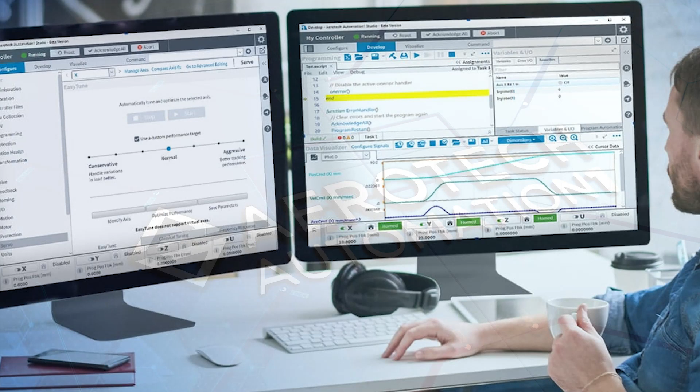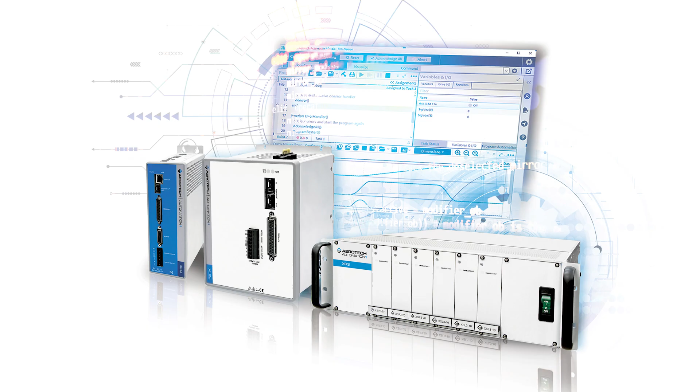Automation1 is a motion control platform consisting of software-based controls and development tools, PC and drive-based hardware, and hardware-based drives for servo motors and other devices. In this video, you will discover new features available in the 2.3 Automation1 release.

This includes additions such as Automation1 iXL2e support, MachineApps full support, EtherCAT full support, velocity and current mode additions, the official Q mode support, as well as several improvements such as data visualizer, programming module, EasyTune, .NET API, and Python API improvements. Let's get started with the Automation1 iXL2e.

This is an enhanced compact linear servo motor drive with a motion controller. The Automation1 iXL2e is a powerful machine and motion controller. It controls up to 12 axes over the Hyperwire fiber optic network. It executes real-time AeroScript programs and can also be communicated with via the .NET, C, and Python APIs from Automation1.

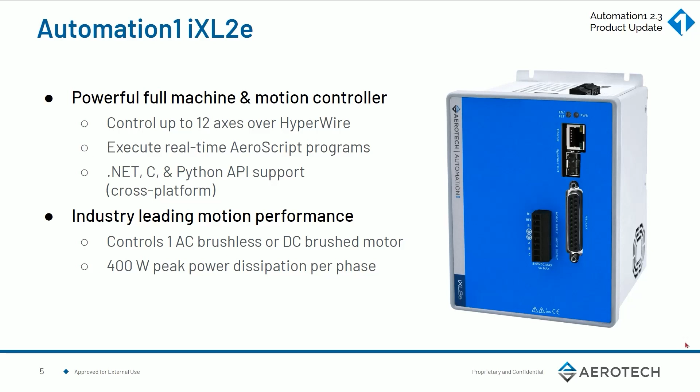These are cross-platform for Windows and Linux applications. It also has industry-leading motion control performance as far as controlling a servo motor or a precision stage. It can control one AC brushless or DC brushed motor. Often AC brushless motors are integrated into the stages, and it also has up to 400 watts peak power dissipation per phase. Onboard I/O expansion capabilities are available, although not pictured in this image.

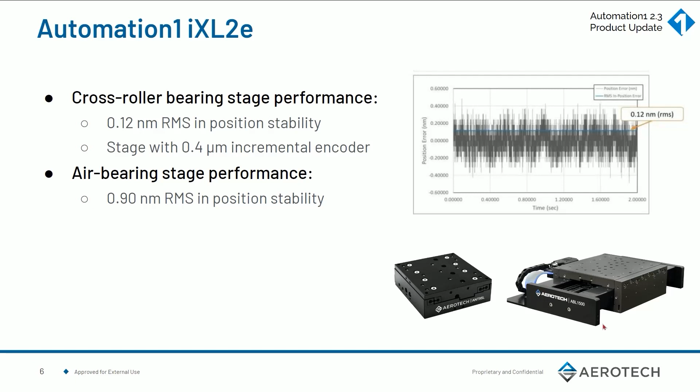The Automation1 iXL2e on a cross roller bearing stage demonstrated industry-leading performance: 0.12 nanometers of RMS in position stability, measured by a stage with a 0.4 micron incremental encoder. On an air bearing stage, which doesn't benefit from the high friction in the cross roller bearing, it also achieved very good results: 0.90 nanometers of RMS in position stability.

Moving on to the connectorization of the Automation1 iXL2e, you'll see that the main motor supply and motor output are all in one single connector. To the right of that, you have your feedback for all of your stage signals and encoder feedback signals. You would connect to this from your PC or network over the Ethernet network.

Also available is connectorization by USB. You would then connect to several other Automation1 drives over the Hyperwire network, up to a total of 12 axes of control, so 11 additional axes over the Hyperwire network, which you only have an output here on this drive because the controller is actually integrated into this drive hardware.

If you choose to purchase the expansion board, you would get the position synchronization outputs, the auxiliary encoder channel, and also analog and digital I/O. If you choose to expand with the EB2 option, instead of the I/O, you would get industrial Ethernet support on the top of the drive. So these two come with EB1 or EB2. The point-to-point I/O comes with the EB1. The industrial Ethernet I/O expansion comes with EB2.

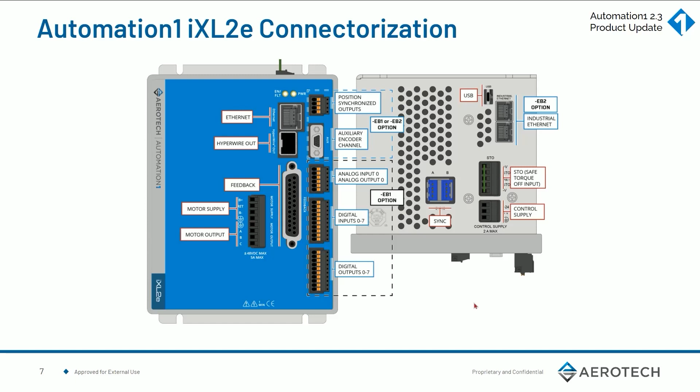Standard on the drive will be the sync port for all options, and those are for communicating encoder data to and from other axes on the system. And of course, the safe torque off, integrated safety, and the control power here as well. So that's the connectorization of the iXL2e from Automation1.

Let's look at a comparison versus legacy ML drives. Comparing this to the Ensemble ML, first of all, let's note that this is the in-place kind of replacement, the Automation1 replacement product. In the Automation1 version, the iXL2e, the drive array is 67 times the size of what the ML brings to the table.

That also is coupled with a much faster drive data capture rate, 10 times the speed at 320 kilohertz. But please also note that these values are 64-bit values, not 32. So effectively 20 times the rate when you look at all the data, the throughput.

As for safety, yes, there's functional safety, STO. There's sine wave quadrature emulation. Latency is 4 times faster at 0.8 microseconds versus 3.25 microseconds. And then there's more encoder channel options and more PSO options.

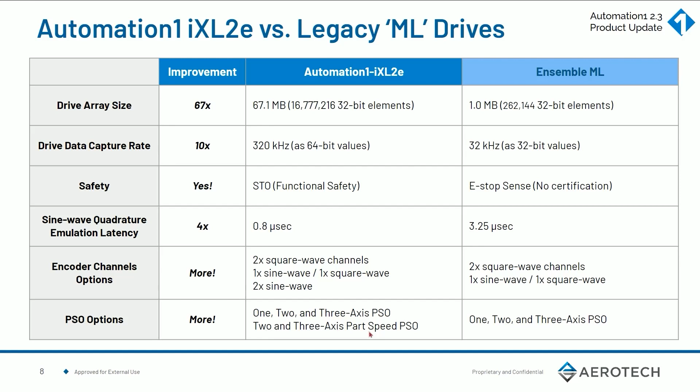Highlighting that is 2 times sine wave inputs, so you can have primary and auxiliary sine wave encoder inputs, often required for dual loop multiplied control of a stage system. For PSO options, you have the option of purchasing the 2 and 3 axis part speed PSO options, which were not available in the Ensemble product line at all.

Moving on to the controller side of things, the Automation1 drive-based controller has several advantages versus the predecessor, the Ensemble. The first is that we have 2 more axes of control available. For all systems, you can get up to 9 user tasks to program and 1 reserve task. This is 5 total tasks more, and at least 4 more tasks for a user to use, so that's a big addition.

Another big advantage is that the servo trajectory rate at the controller is calculated at 20 kilohertz. Please note that the Ensemble tried to solve that problem by doing interpolation, which was very nice and well received and ahead of the servo loop, but those were not calculated points like the controller actually calculates. The points are not interpolated.

Look ahead and acceleration limiting is always included on the ISMC, the Automation1 controller. G-code programming is always available. Corner rounding, parts rotation, and retrace are always available on all Automation1 controllers. They weren't even available on the Ensemble motion control platform.

Then, of course, you have this key advantage of developing your application in the Automation1 Motion Development Kit, which is a much more advanced software tool than the Ensemble Motion Composer suite.

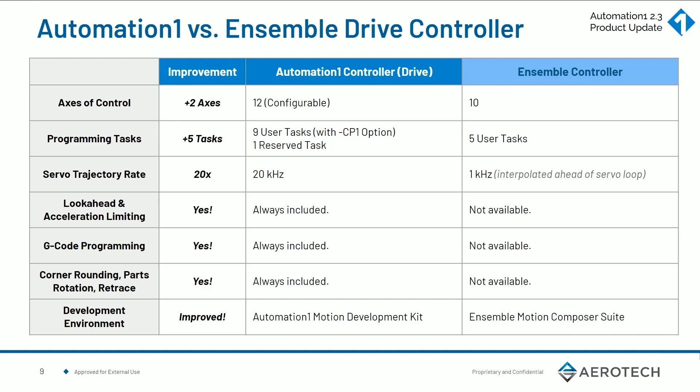Now, when it comes to ordering options, you have 1 peak current option, 10 amps peak. You have 3 different expansion board options: either you don't need one, or you get the IO-based one that we just saw, or the industrial Ethernet-based expansion board. Those are the 3 options you have, EB0, EB1, or EB2.

You have 3 multiplier options. Either you don't need an encoder multiplier, MX0, or you just need 1 encoder multiplier, that would be MX1. Or in the rare case you do need 2 multiplied encoder inputs, you can get the MX2 option and have 2 multiplied encoder inputs for 2 amplified sine wave encoders.

When it comes to PSO, as noted, you see the PSO5 and PSO6 options for part speed PSO, but you also can order the 1, 2, or 3 axis traditional Aerotech PSO based upon the encoder feedback, firing an output based upon actual distance traveled, the position synchronized output feature. So plenty of options in the Automation1 IXL2E.

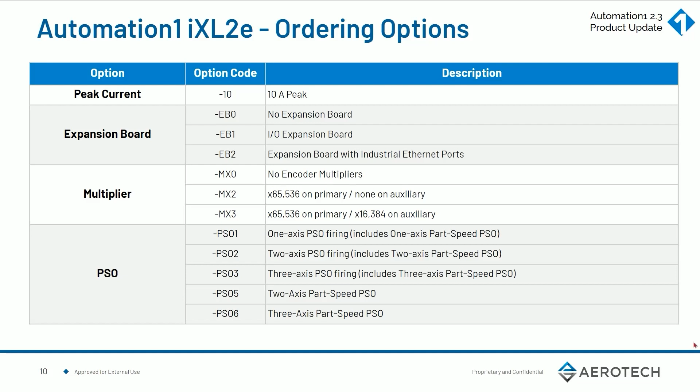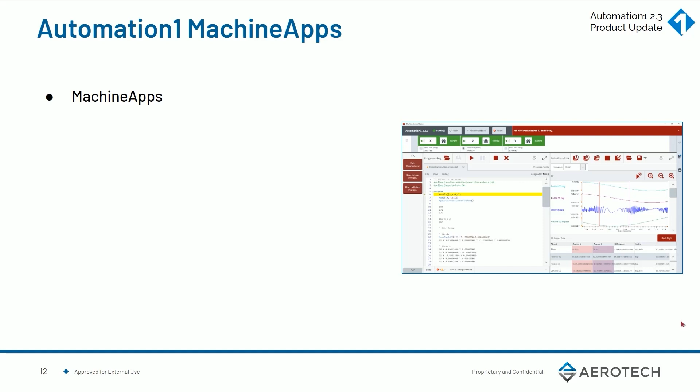Moving on to MachineApps. This is an HMI builder for Windows PCs. In 2.3 Automation1, we have the first official release of MachineApps, and again, this is for custom user interfaces for Windows PCs.

To create these interfaces, you would use the MachineApps Workspace. This is your design tool, and it is an Automation1 MDK ordering option. It also shows up as a workspace inside of the MDK when you order it. Now you also get the MachineApps application with every installation of Automation1's MDK.

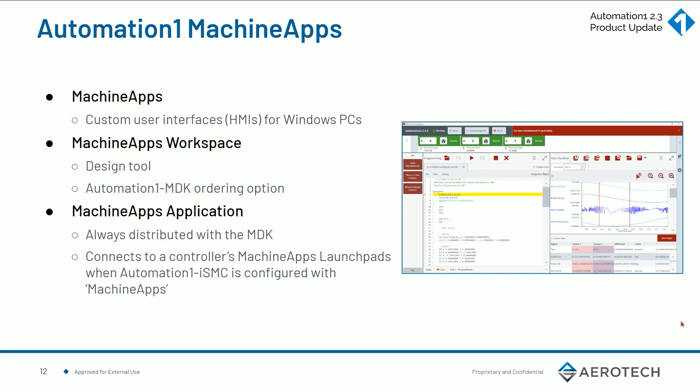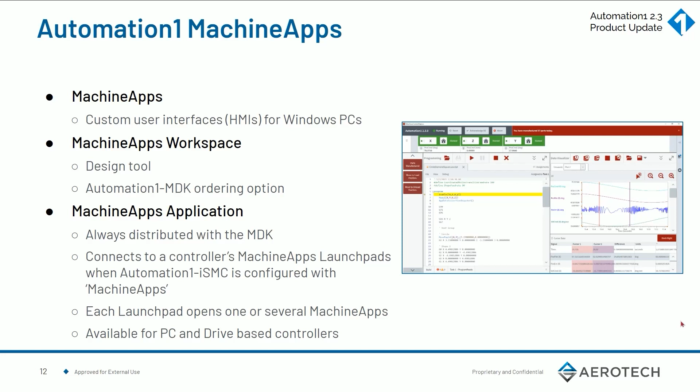That application allows you to connect to a controller's MachineApps launchpad when that Automation1 ISMC controller is configured with MachineApps. Each launchpad opens 1 or several MachineApps. And this, of course, is available for PC and drive-based controllers. So it doesn't matter how you plan on deploying your ISMC, you can take advantage of these great new HMI tools from Aerotech, the MachineApps feature and toolset.

When you get into the actual workspace after defining your layout, then you start picking some settings. You would name your machine app, pick icons and colors. This is how you deploy your own brand, more on that later. You would opt into touchscreen sizing if you want to deploy to a touchscreen monitor, and this is only in beta right now, so we're going to be doing some more work in this area.

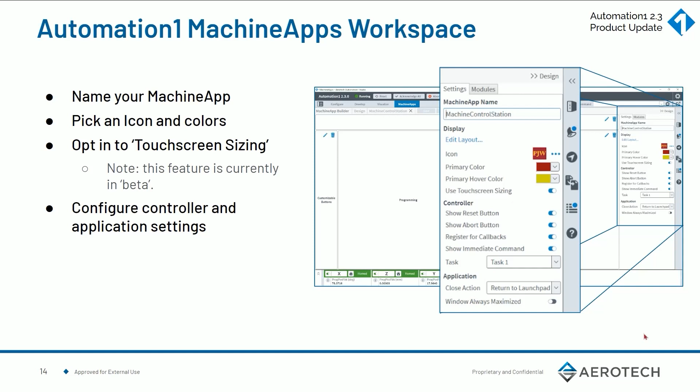You'd also configure your controller and application settings, such as showing the reset or abort buttons, whether you want to register for callbacks—that depends on the type of application you're building—whether you want to show the immediate commands in this machine app or not, and then also what happens when you close the machine app. I enjoy closing it and returning back to the launchpad where I may have several machine apps and want to open up another one.

Next up, you look at the modules section, and this is where you drag and drop your modules into place. As you can see on this screenshot, each area has a module defined: axis dashboard, customizable buttons, programming, data visualizer. We've already dragged and dropped modules into these different module areas.

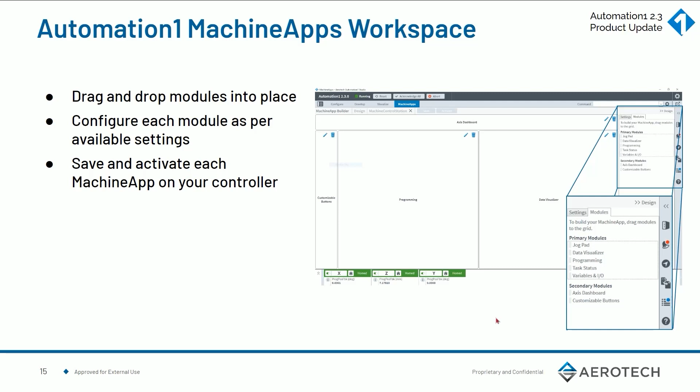Then you would save and activate. So up here, you can see it's in gray, but it says save and activate that on your controller. So this machine app has been laid out, it's been saved, and it's active on the controller of which we're working.

Let's go module by module and see which features are available in each module available to you in MachineApps.

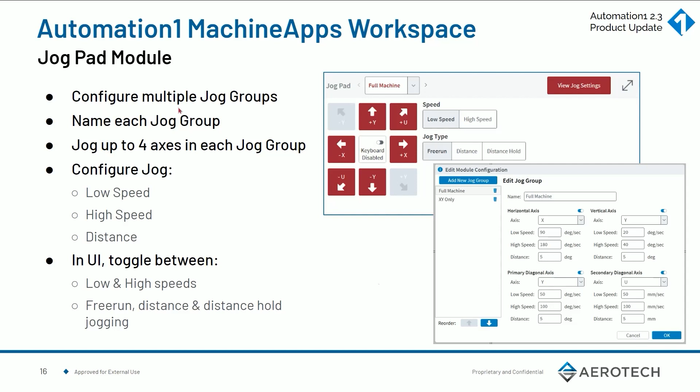First, the jogpad module. You'll see in the configuration, you can do things such as configure multiple jog groups. You can name each group. Each group can jog up to 4 axes. You can configure low and high speeds and distance.

And then from the UI, which is what this background image is, it's actually a screenshot of the user interface that you would have on the machine app. You can choose whether you want the low or high speed, whether you want to jog in free run distance or distance hold mode.

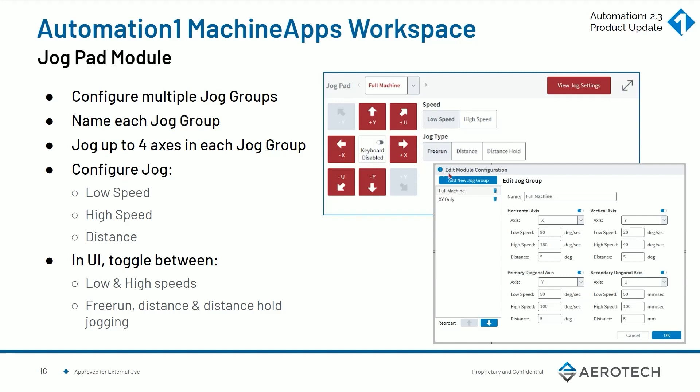And then you can change between your different jog groups. So I can change from full machine to just XY only, which are my 2 named jog groups that you see here in the module configuration module. So this comes up and allows you to pick all your settings for how you want this to work in the UI.

Next up, the data visualizer. Same idea, you have a configuration screen. Whenever you drag and drop that module into place, this will pop up, and then you just fill out these options. And then the output of that is that the user in the machine app itself would see this data collection screen. As you can tell, all the colors I picked in my branding are applied here to all of the push buttons. So you have some custom capabilities you can deploy.

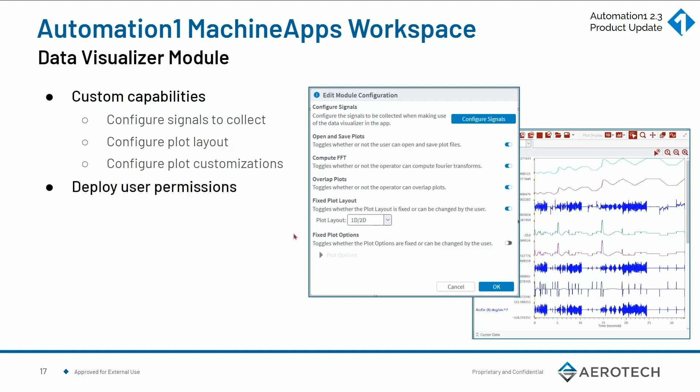You can configure signals to collect. So you'd click on this and a signal configuration dialog would open. You can configure your plot layouts. You can configure plot customizations. And you can deploy user permissions for different features, such as open and saving plots, computing fast Fourier transforms, switching plot layouts, and changing plot options.

Moving on to the programming module. This module, you can see in this image, the actual deployed module has the touchscreen settings enabled because we have the large push buttons here for the control of the actual programming module in the machine app itself.

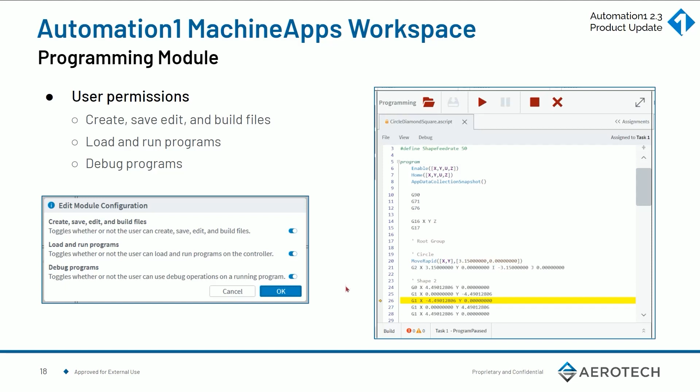Here you can pick your user permissions. So what things do you want your user to be able to do when using this programming module? Well, here you have the options of create, save, edit, and build files, load and run programs, debug programs, and those are the 3 options you can opt into or opt out of in the programming module.

Here you also have task status and variables and IO modules. There's not much to say here. You can add these to your user interface. And the only real permission to add here is editing access to variables and IO values. So you can say, yes, you can edit the value of IO. So here you see I have that permission enabled that you can do this.

This toggle switch allows you to toggle the state of an actual digital output. So this gives you the ability for a user to do that. If you don't want users messing with outputs through this module, simply turn that off and your user will not be able to do that.

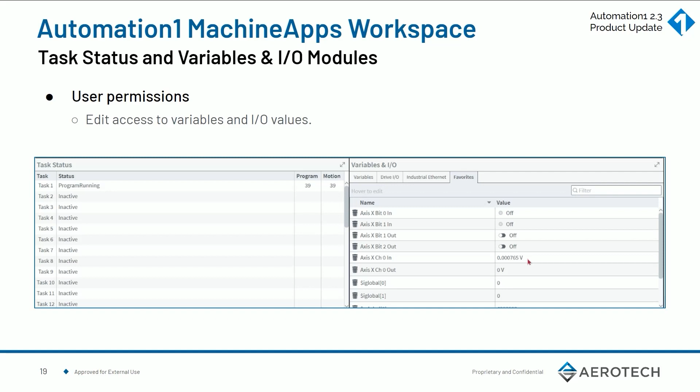Moving on to secondary modules, the Axis dashboard. It's not really secondary in use. This is a very often used module, but it's just secondary in layout, or it actually shows up on the screen. It's not part of your primary layout.

So looking at the Axis dashboard, you can see again, this is in the touchscreen mode with the large buttons, making it easier for an operator to hit the right thing on a touchscreen. You can deploy user permissions such as enable and disable axes, home the axes, jog axes. This one might be quite popular because why allow the user to jog axes from here if you are also deploying a jog pad? Conversely, if you're enabling jog axis from this Axis dashboard, you might be able to forego the jog pad altogether.

Custom configuration options include the data signals. You can configure what to display.

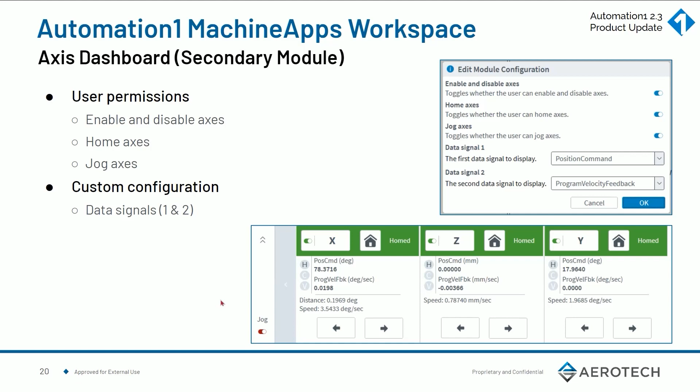Going on to the next secondary module, this one maybe warrants a little bit more conversation. These are your customizable push buttons. First thing I'll say about customizable push buttons is this is where all the fun starts. That's because this works really quite nicely with Automation1's AeroScript programming language, specifically the ability to deploy and build custom library functions and custom library files.

So this is another training course for you, but you can touch base on Automation1 AeroScript's libraries. A user can create their own library functions in a library file and then include that library automatically with every reset of the controller. That means all the library functions that you have are now easily accessible in all of the text editors, all of the intelligent autocomplete tool sets, just as if they're native AeroScript functions. It's really a powerful thing, and you can actually only deploy the compiled library file.

If you're sending this off to a customer, maybe you're somebody who builds and sells machines or deploys them to your production floor and you don't want people to have access to things, you can manage the original text file on your own and simply ship the compiled file. That protects your IP, your intellectual property, and what you've developed, and keeps it secure.

But it also at the same time gives the controller complete access to all the functions that you spent a good amount of work writing. Those functions become accessible in MachineApps. The same IDE backbones that we use for the actual programming module are accessed here in the AeroScript command line interface, so all the intelligent autocomplete and such is accessible here, and you can simply put in a function that calls your library function and it executes with the push of a button in the UI.

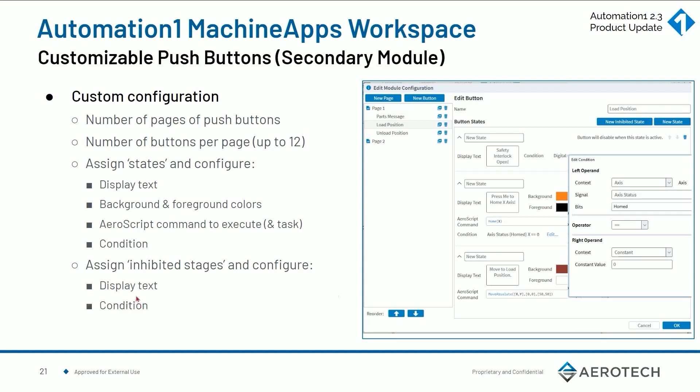Let's take a look at this. I have 3 programmed push buttons here, software push buttons from the customizable push button interface. This shows the default state of that push button. Next one is a condition-driven state where the x-axis is not homed and the button actually changes. And finally, an inhibited state where that digital output is set to 1, and then we enter into this gray safety interlock open state. So that's all 3 types of use cases.

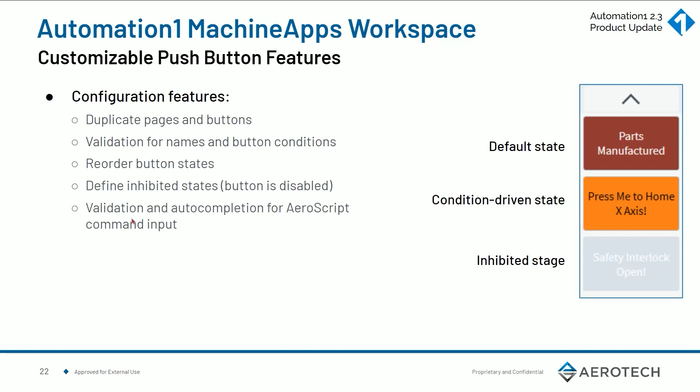Now inside of the configure customizable push button editor, you can duplicate pages, you can duplicate buttons, you get validation for names and button conditions, you can reorder the button states, you can define inhibited states, and validation and auto-completion for AeroScript command inputs is also available for you.

Moving on, a couple more features of the MachineApps interface. First, let's talk about managing controller launchpad title, icon, and background. You can put a title to the launchpad itself - this is not the specific machine app, but this is from where all machine apps are launched. You can create your own icon, and then you can pick a background, either a solid color, or you can actually pick an image from your PC to make the machine app background.

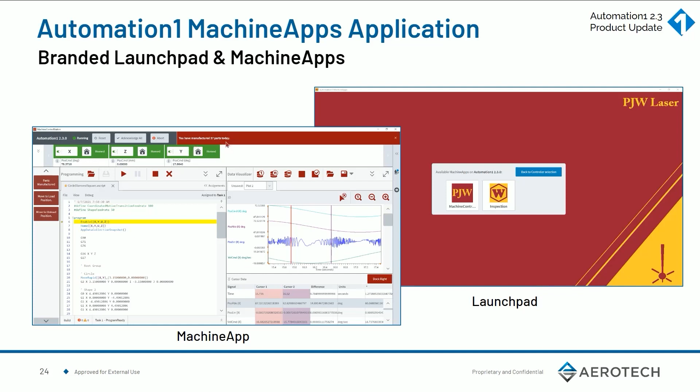And as the app message display function also has branding I decided upon, it showed up here in my user interface, which is quite nice.

Moving on to something completely different, the EtherCAT Industrial Ethernet Network. So what is EtherCAT? It is short for Ethernet for Control Automation Technology. It is an industrial network protocol, and it's powerful because it was built on a very pervasive Ethernet physical layer and standard, addressing concerns such as rapid response time, minimal data requirements, and cost of implementation. Each EtherCAT slave device reads and writes to data frames on the fly, which is what makes it fast and responsive, since it reads and writes as data passes through each node on the network.

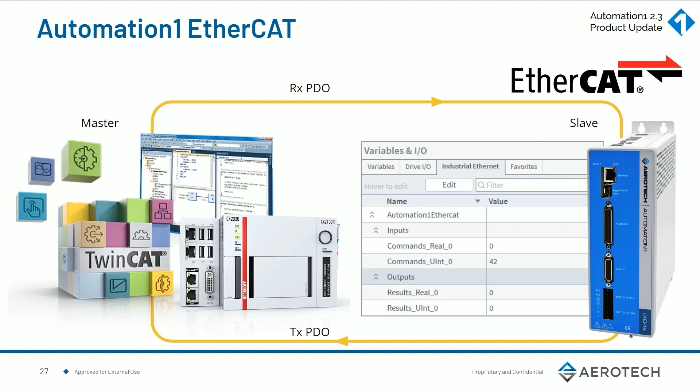This software screenshot shows the inside of the Automation1 Studio environment, where you can set up a series of reals and integers as inputs and outputs. That defines what we call the EtherCAT Slave Information, or ESI file, which is a profile of I/O that allows the master to understand exactly how to communicate to each individual slave device. Automation1 EtherCAT has a process data space, and those operate at a really fast level, with 64 integers and 64 reals in that space. This defines our ESI file.

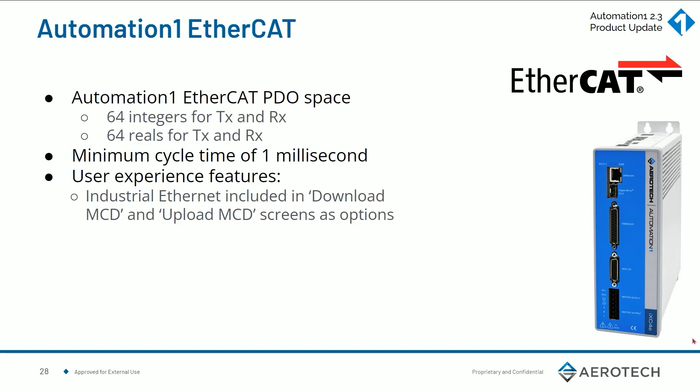We have a minimum cycle time of 1 millisecond, so we're operating at a pretty fast rate of communication. Also, some user experience features inside our own software application include the ability to upload and download MCDs with or without the industrial Ethernet configuration. That means if you want to duplicate your system quickly, you can choose to download the industrial Ethernet configuration as part of your MCD file and then upload it on your next controller the same way to duplicate your full controller architecture.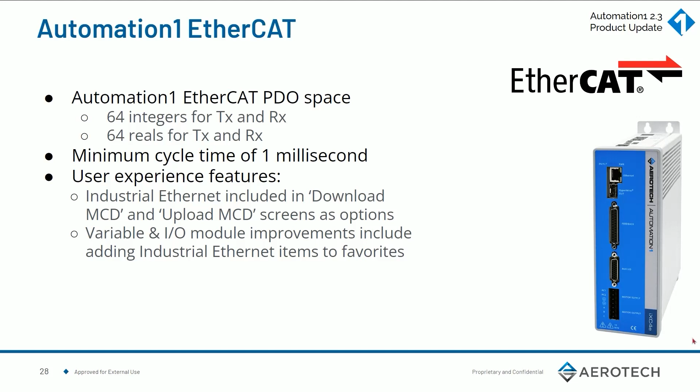Another thing we've improved upon is that the variable I/O module now includes the ability to add industrial Ethernet items as favorites. So if you want to look at a couple drive I/O items and a couple industrial Ethernet items in one common screen as a list of favorites, this is now part of that architecture, which is really nice for checking out systems and commissioning them.

All right, moving on to velocity and current modes of operation for our drive hardware. We added these modes to the analog control feature in Automation1. This is when you use an analog input to control the velocity or current command of a drive. When you use these modes, you can use separate analog inputs to control velocity feed forward and acceleration feed forward, giving you access to those features.

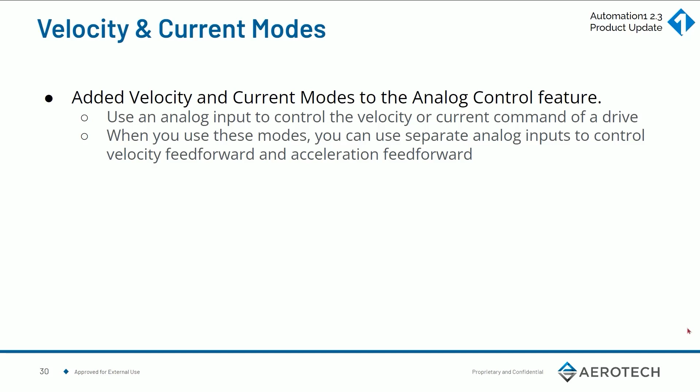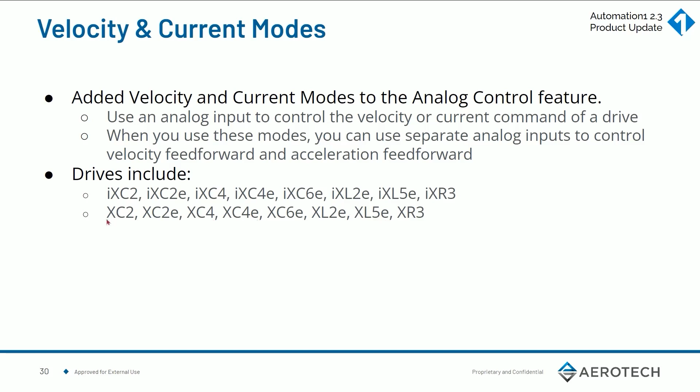The drives that have this include all of these iDrives and their standard drive variants that don't have the controller included, which is really nice. That means that as long as you have each one of these drives networked to a PC-based controller or another iDrive, they can operate in this mode.

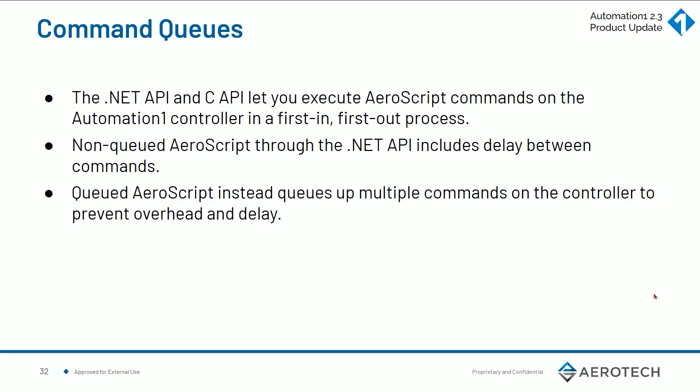Next topic, official command queue support. The .NET API and C APIs let you execute AeroScript commands on the Automation1 controller in a first in, first out process. This is really important because non-queued AeroScript through the .NET API includes delays between these commands. So the command queue is one way to reduce or eliminate those delays. The queued AeroScript instead queues up multiple commands on the controller to prevent overhead and prevent delay.

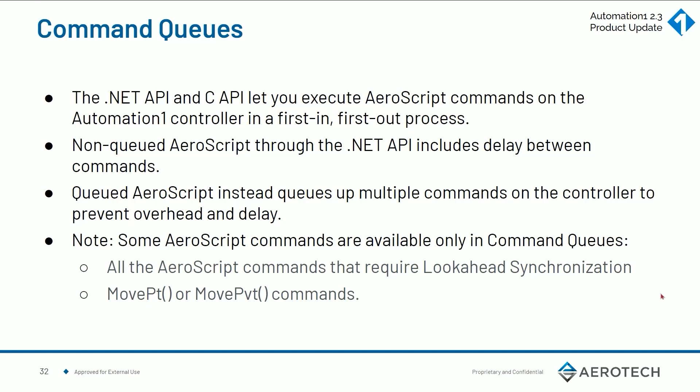In this official support of command queue, some AeroScript commands are made available only in command queues. These are things that require look-ahead synchronization, such as move PT or move PVT commands. So for our .NET customers out there, there might be some more restrictions or items to consider because of forcing some of these commands into the command queue model. But this is done so you have success executing those commands and don't experience delays that might stop your motion from performing the way it needs to.

Other improvements in 2.3. First, we'll talk about the data visualizer improvements. Plot interactions in 1D and 2D. This I like a lot.

So that's a very nice feature to have in this concurrent view of 2D and 1D data. It's almost like watching a movie.

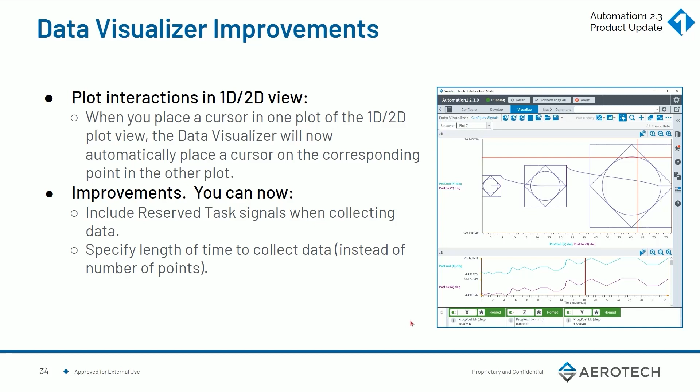Improvements: you can now include reserved task signals when collecting data, and you can specify the length of time instead of the number of points. If you think in time, not necessarily data points, and do that calculation for time based upon the signal period, this makes it much more straightforward for users who are thinking in time. You can overlap two or more time domain plots, and you can also open up a DAT file and plot only the data points that are present in the file, which is a very nice user experience improvement.

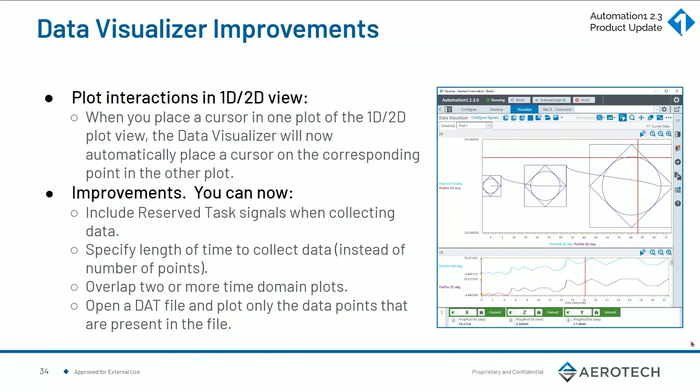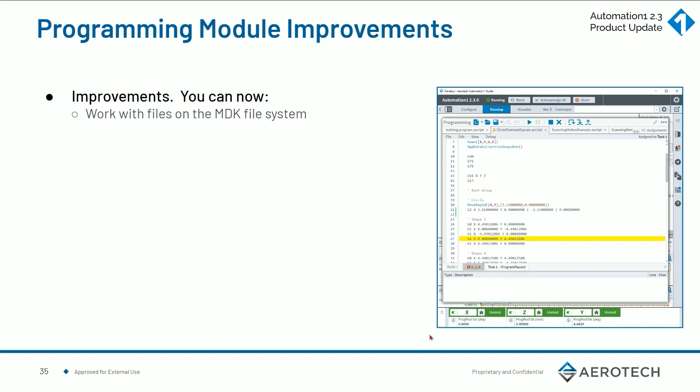On the programming module, lots of things to talk about here. Let's get started. You can now work with files on the MDK file system, and this is going to be really popular for our PC-based controller folks who want access to Windows. Our PC-based controllers are Windows-based controllers. They run on a real-time operating system in front of Windows, but on Windows PCs. And our drive-based controllers operate on Linux, so that's the difference there.

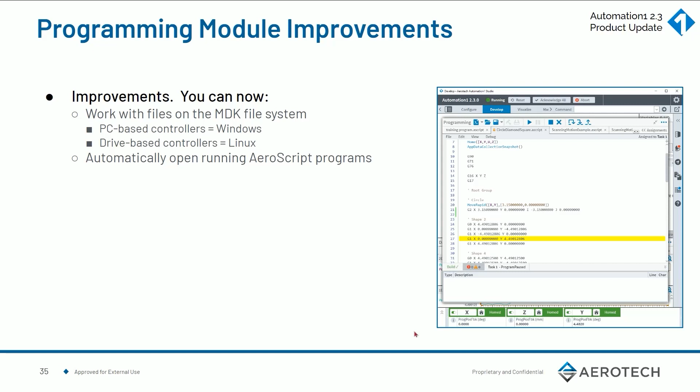Automatically opening running AeroScript programs is a new improvement. You can enjoy automatic parentheses, brackets, quotation completions, and delimiter matching in the programming module. You can enjoy automatic indentation when you add a new line to an AeroScript program. You can open and run compiled AeroScript files.

You can see task state information like 'task 1 program paused' in the status bar. You can disable program execution line tracking, which means this yellow bar on the line of code being executed right now can just jump off your screen and your screen won't update to try to chase it down. So if you're running programs with thousands of lines of code that just run away, you might not want to try to follow that yellow line all the way down. Now you can choose to just stay where you're at in the program.

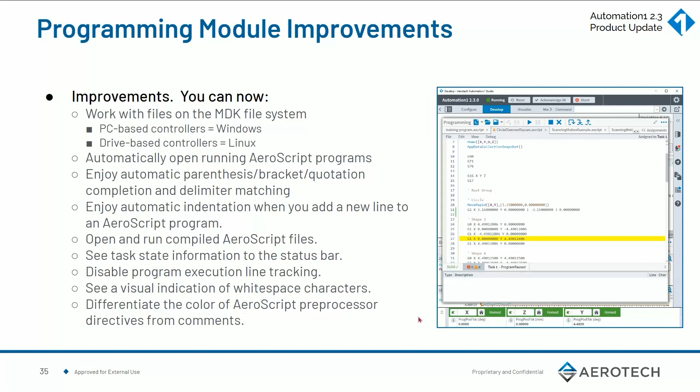You can see a visual indication of white space characters, which I'm not really seeing here on this screenshot. And then you can differentiate the color of AeroScript preprocessors, such as pound define statements and pound includes, from comments. They used to be the same exact color in our graphical user interface here. Now they have different colors, so you can tell the difference between them visually quite quickly.

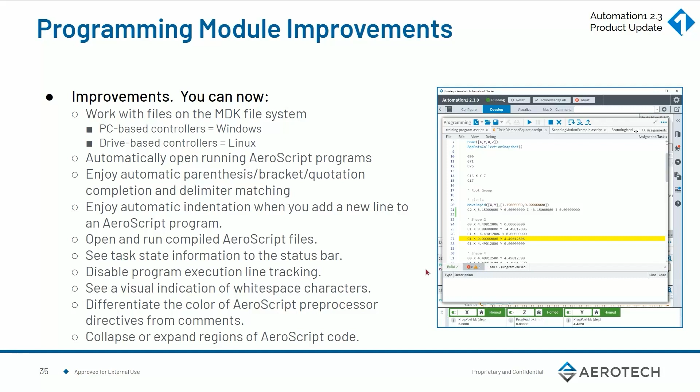And then you can expand and collapse regions of AeroScript code. I wish I was showing it nicely here, but if you had a function, you could just collapse the entire function or loop structures and things like that. Another thing that's really nice is that you can go split screen mode. There's a little up and down arrow where you can have two different screens now in two different places in the program, which is another nice programming module improvement. So lots of things to be excited about here from a user experience point of view.

EasyTune improvements. EasyTune is one of those features that just works. You don't need to know a lot about it, but just know that in 2.3, we improved how it works. We improved how it calculates gains and filters. So expect better performance out of EasyTune in this latest release of our motion control platform.

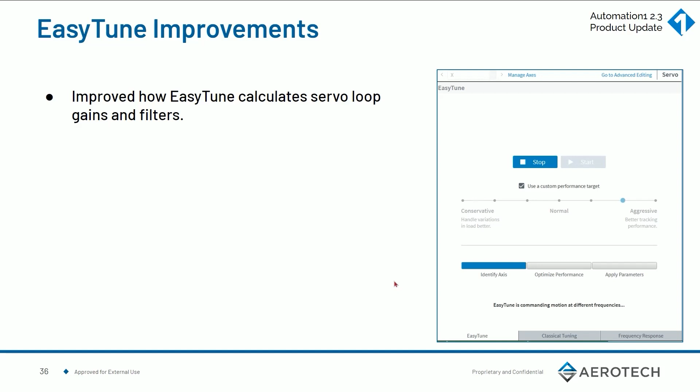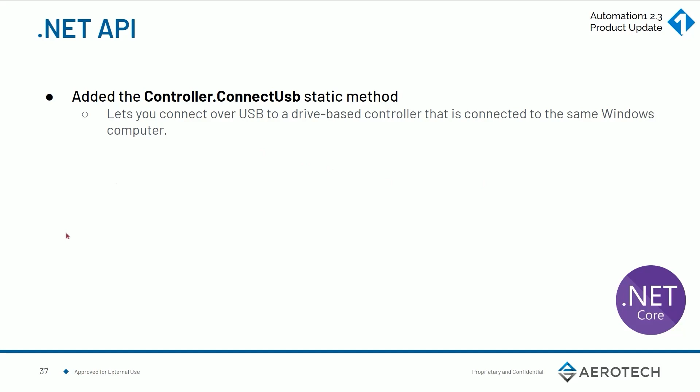In the .NET API, we added the controller.connectUSB static method. This lets you connect over USB to drive-based controllers connected to the same Windows computer. We also added this new drive array read method, which lets you read the contents of the drive array from a device.

Now you can compile more than one AeroScript source file at the same time from different threads. You could do things like execute an immediate command while you compile an AeroScript source file from a different thread. And then you can access, and this is probably the headliner although I listed it last, the .NET help at help.aerotech.com/automation1. The full .NET API overview is there.

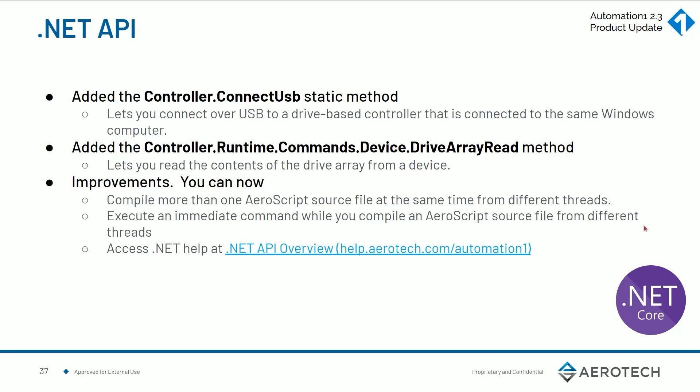In Python beta, several improvements. We've added a controller configuration API. And again, the Python API is still in beta—we're still figuring out the last couple of items. We expect to release this as non-beta in the coming months.

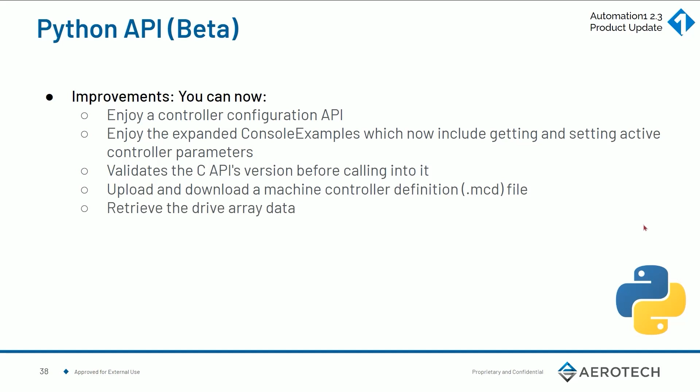You can enjoy expanded console examples, which now include getting and setting active controller parameters. It also validates the C API's version before calling into it. You can upload and download a machine controller definition file from the Python API. You can retrieve the drive array data, and you can connect to drive-based controllers over USB.

That concludes this motion control platform release update. Thank you for watching. I hope you enjoyed learning about all the new features available in the 2.3 Automation1 release.